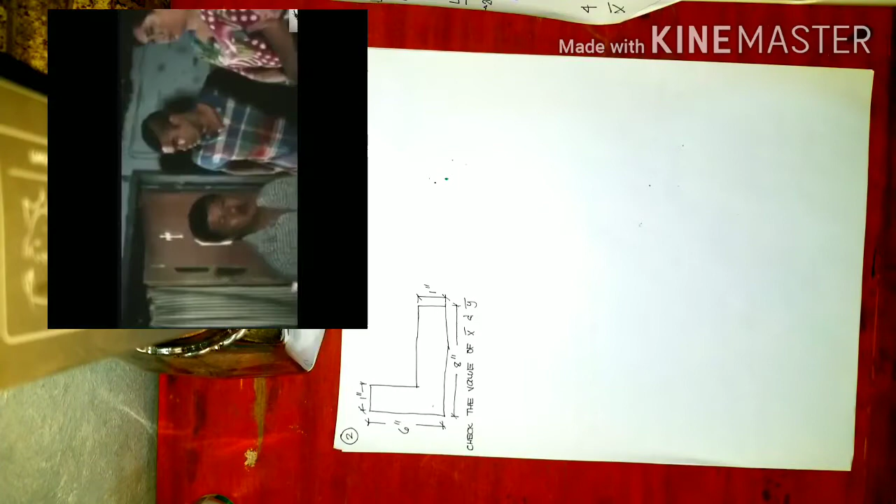Wow! Okay, so how do we do this? So, switch to your PowerPoint. This is the next slide. Problem number 2, composite area. So when we say composite, you have a figure composed of different shapes.

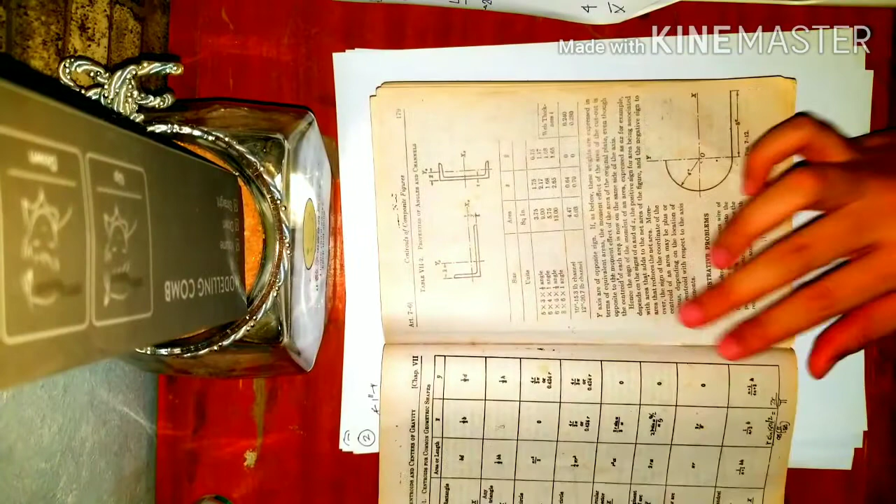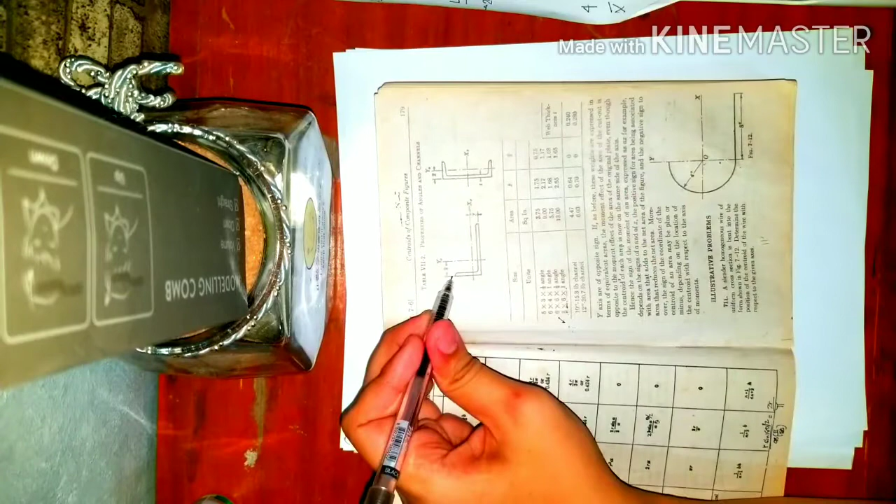Okay, so in the table, the total area is given, x-bar is given, y-bar is given. So this is the x-bar, and this is the y-bar.

So this axis, the x-sub-o and y-sub-o axis, that will be your centroidal axis. Centroidal meaning, at the centroid of your composite figure, that's where I made the x and y axis. That's why it's called the centroidal axis.

So when will you use this? In the next topic, which is the moment of inertia.

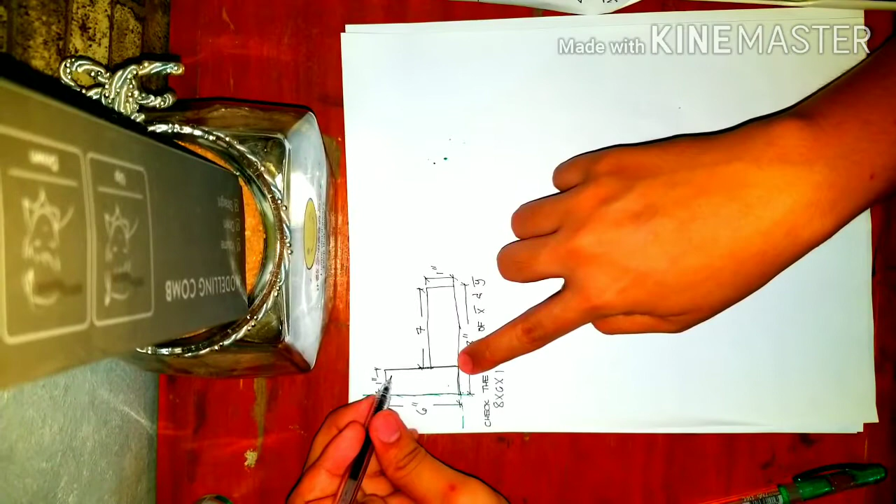Okay, so we formed two rectangles. What will be the dimension of this? Knowing this is 8 and this is 1, therefore this will be 7. And then if this is 6 and 1, this becomes 5. We don't really need the rest.

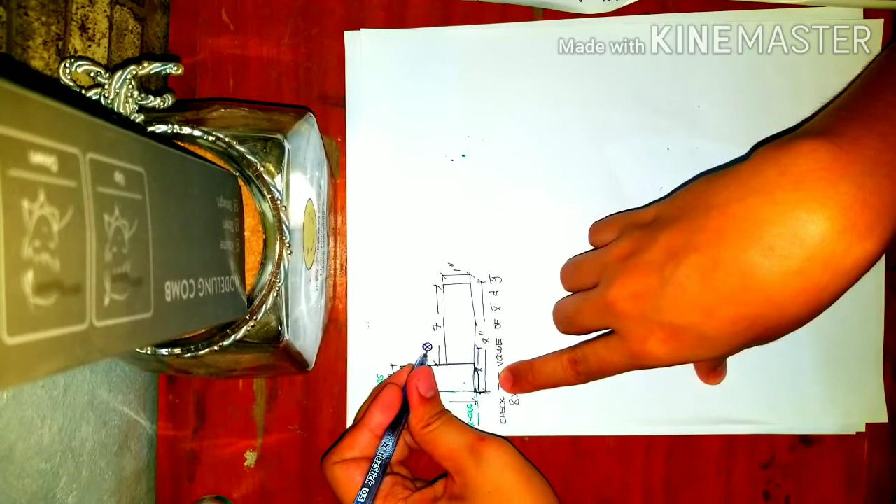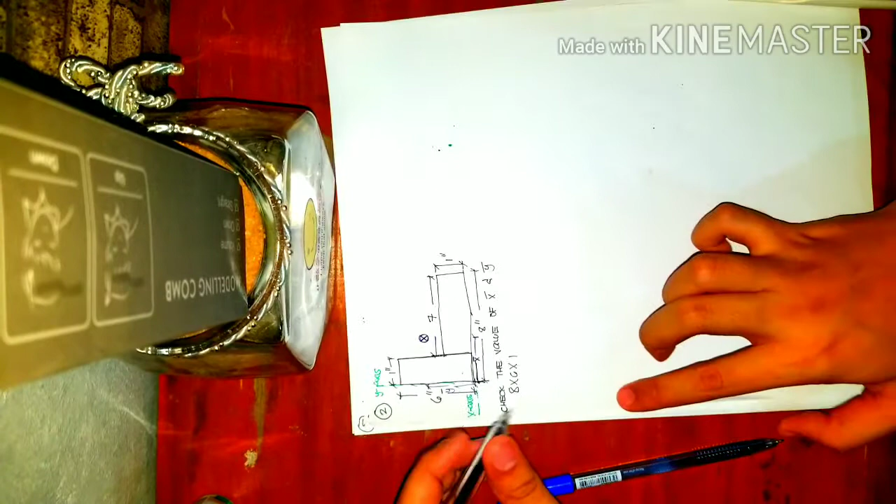Kagaya doon sa kanina, ito kasi length lang ng wire mo. So this time, area na yung pinag-uusapan. Mangyayari, we need to solve first for the total area. Ganun lang din yung magiging formula niya, parang ganun lang din yung concept. So area total, multiply by X bar or Y bar.

Unahin muna natin sa X bar. Is equals to the summation of A, area, tsaka X. So summation ng mga shapes na nabuo para mabuo yung ating composite area. So that will be A1, X1 plus A2, X2.

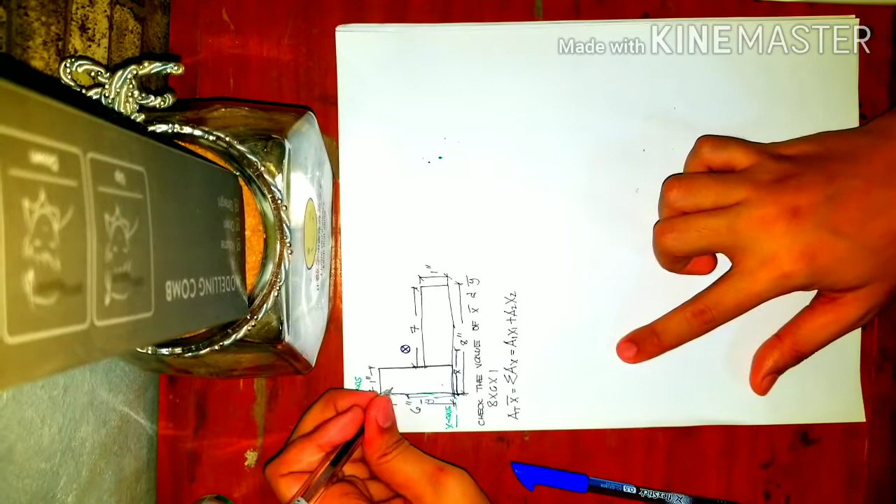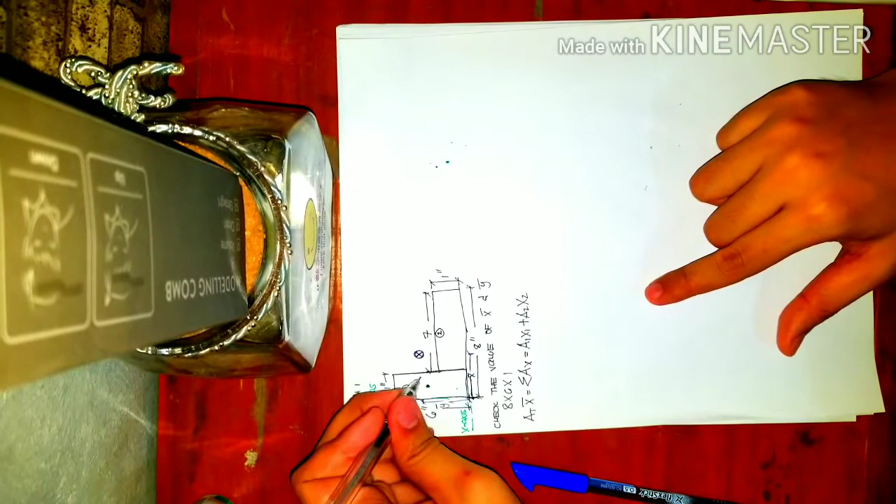Pangalanan muna natin yung mga rectangle natin. Sabihin ko to as si rectangle 1, and then ito si rectangle 2. Next thing to do, i-plot mo kung nasan yung centroid ng rectangle na to. Diba ito rectangle lang? Kung ito 1, ito therefore yung centroid niyan dito, kalahati lang, diba? And kung ito 6, syempre yung centroid niya nasa gitna lang din ito. Alam natin na ito, coming from this top, 3, so dito sa baba 3 lang din. Ayan, kinuha ko na lang din. Ito yung ating rectangle 2, andito lang din siya.

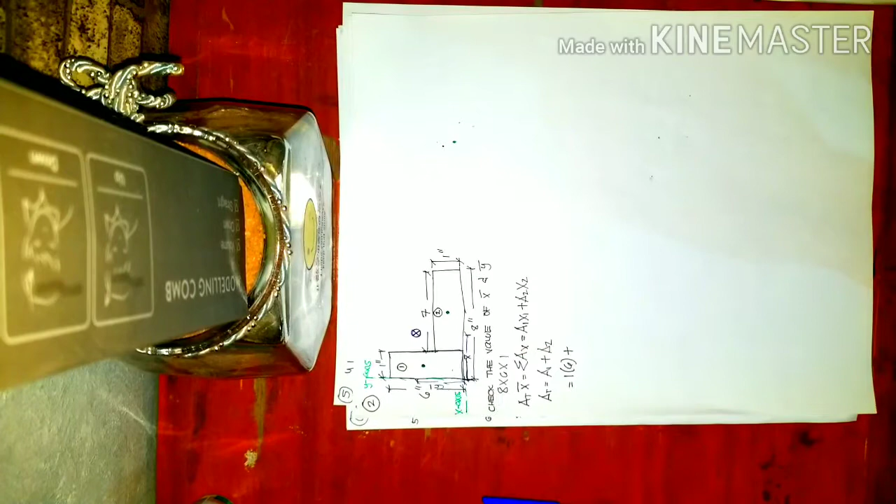Minarkahan ko na. Okay, unahin muna natin yung total area. To get the total area, that is just the sum of area 1 plus area 2. Ano ba yung area 1 natin? Itong rectangle na to, 1 inches multiplied by 6 inches, so 1 times 6. Plus area 2, anong area 2 mo? 7 multiplied by 1. So total area is equals to what? Sige, calculate mo, 6 plus 7, 13. So 13 inches squared.

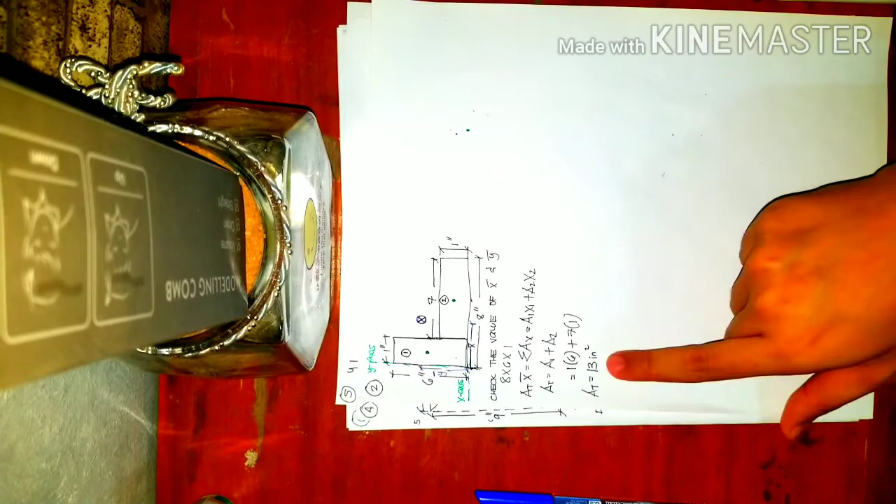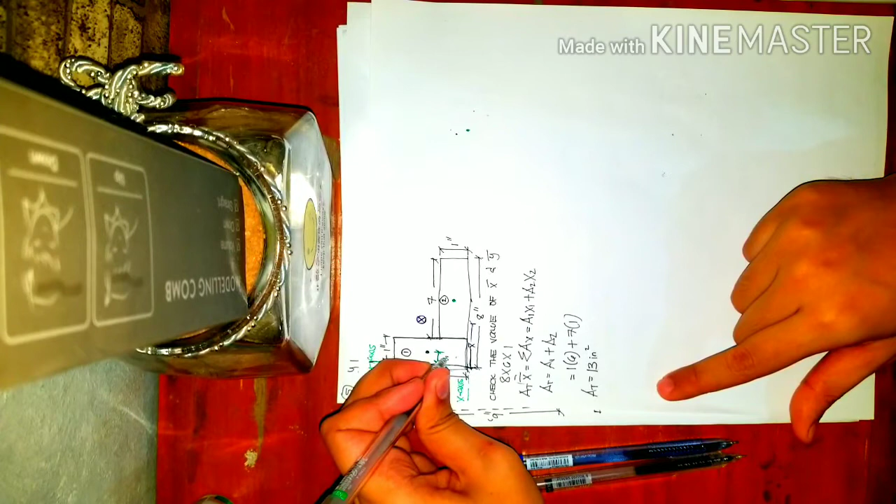Okay, since we have now the area, we can now solve for the X bar. Again, kapag X yung hinahanap, ang gawin mong reference axis is yung Y. Yung distance ng mga centroid mo coming from the Y-axis. Unahin natin si 1, ano ba yung distance nito coming from this axis? Diba ito lang siya? Yan yung... ah sorry, that is the x1. Kung saan yung x1 mo, equals lang saan? Tama, kalahati lang ng 1 or 1 half.

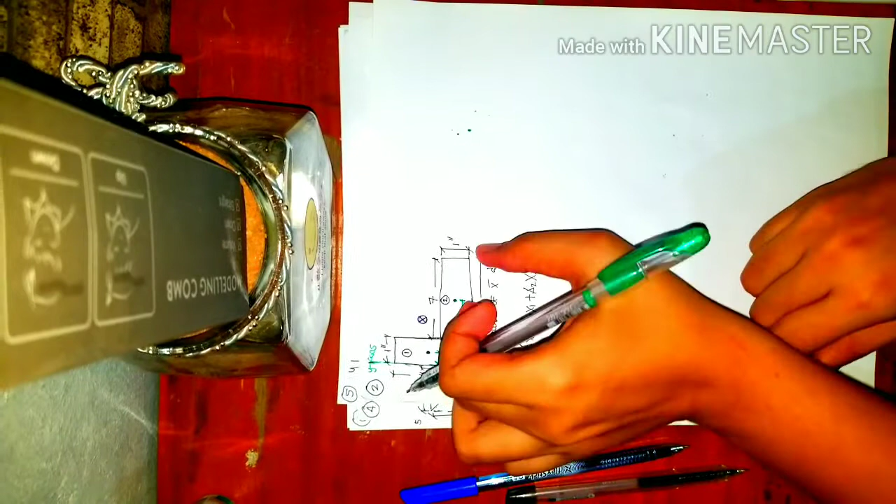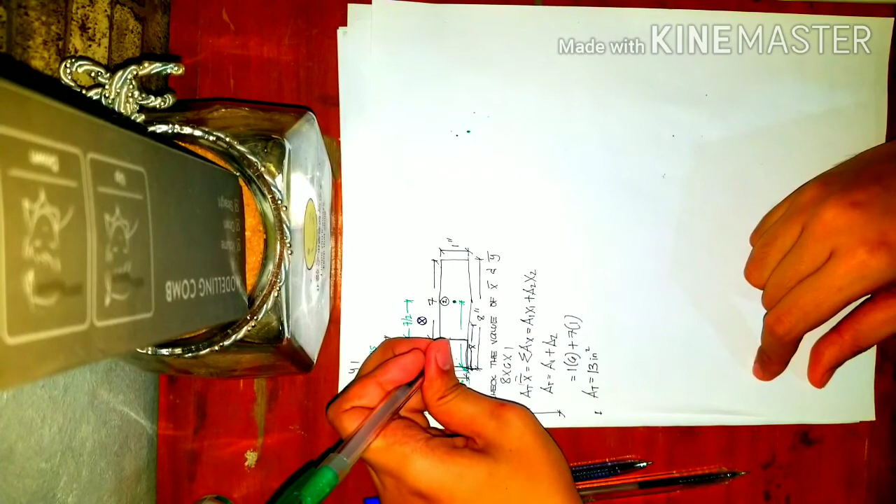Next, si x2. Again, coming from the y-axis, papunta doon sa centroid ng area 2. Ano yung distance na yan? So ano nga ito? Ito, diba kalahati lang ng 7 o 7 halves? 7 halves lang din ito. At sabi nga, coming from this axis, papunta doon, ano yung distance na yan? So ayun, 7 halves plus 1. 7 by 2 plus 1, so that will be equals to 9 halves.

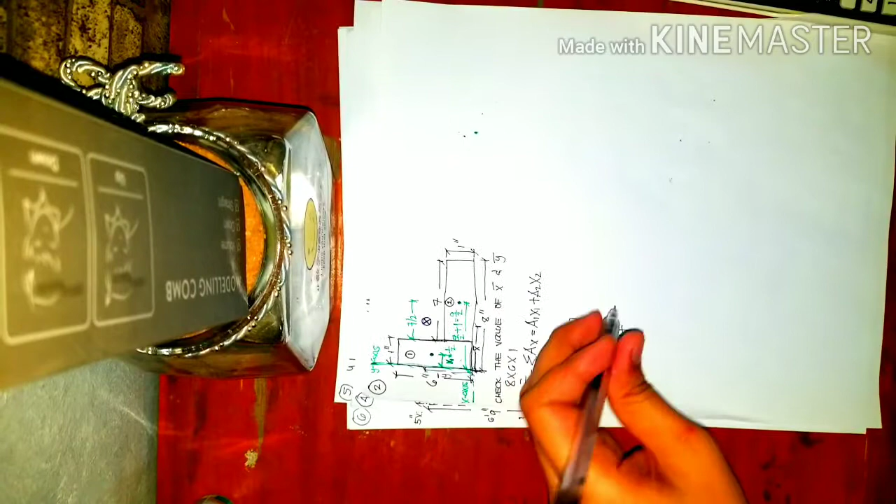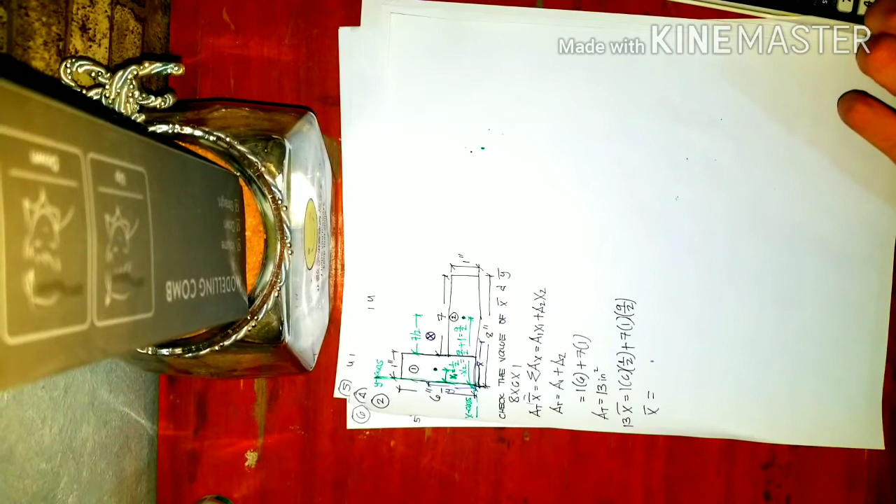At so we have now the value of x1 and x2. I think we can now solve for the x bar or the centroid of the composite figure. So we have 13 multiplied by x bar is equals to a1. Ano nga yung a1 natin? Kopyahin mo na lang to, 1 times 6 multiplied by x1 which is 1 half. Plus itong area 2, copy mo lang itong portion ng equation na to, 7 times 1 multiplied by x2. So x2 is just equals to 9 halves. So what will be the value of your x bar? 3 plus 7 times 9 by 2, all over 13. That is 2.6538 inches.

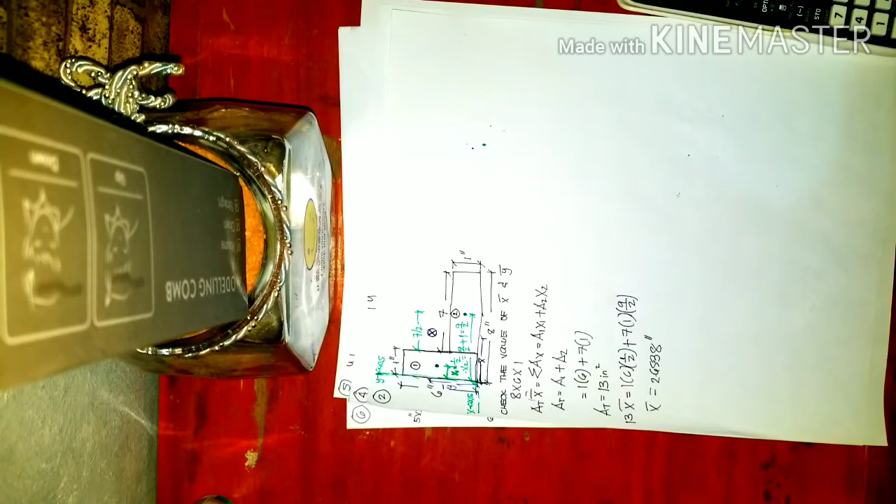Ano? So let's just check, ito sa libro. 2.65, okay so tama naman. Next will be the y bar.

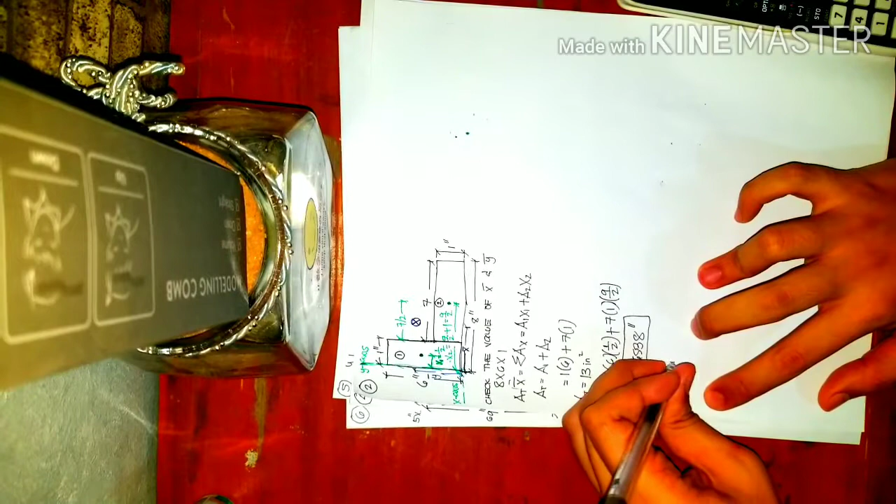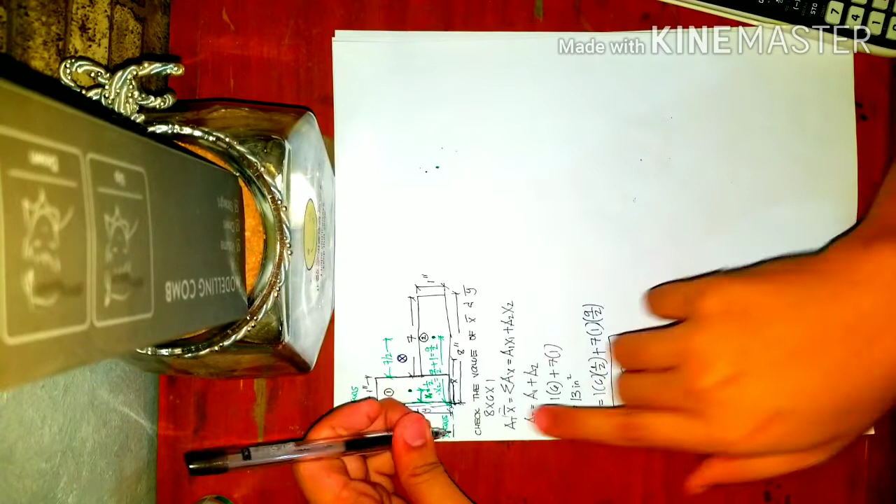Ganun lang din, pag y bar naman, sige sulat mo na natin yung formula. 13 y bar is equals to a1 y1 plus a2 y2. Ano naman yung gagawin doon? Since meron tayong value ng area, hanapin natin yung value ng mga distance na y. Again ang hinahanap is si y bar, ang kapartner niya yung opposite na axis niya, which is the x-axis. Ako lang itong x-axis. Ano yung mga distance ng mga centroid ng bawat shape na na-produce natin? Ng rectangle 1, rectangle 2. Para sa value ng y1, ito ang kailangan mo.

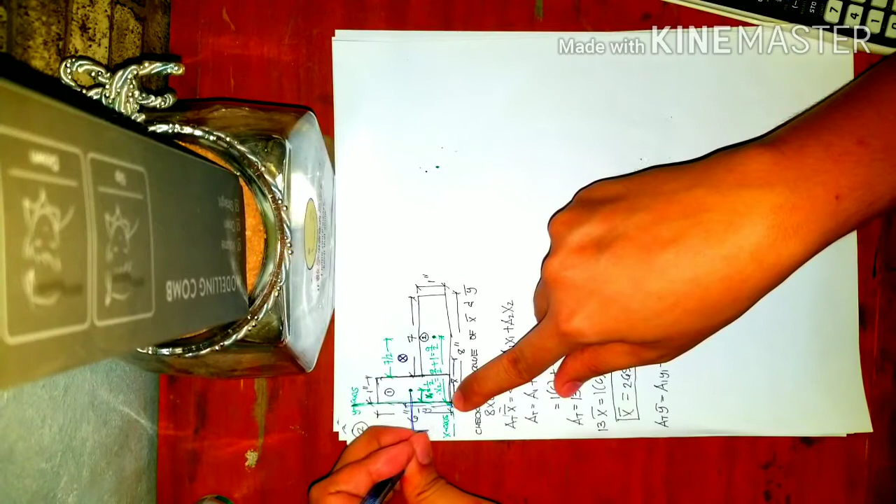Ano yung distance na yan, coming from this x-axis? Diba ito rectangle? Ano yung centroid ng ating rectangle? Diba ito? Kung ito ay 6, ano to? Kalahati lang ng 6 or 3. Gets?

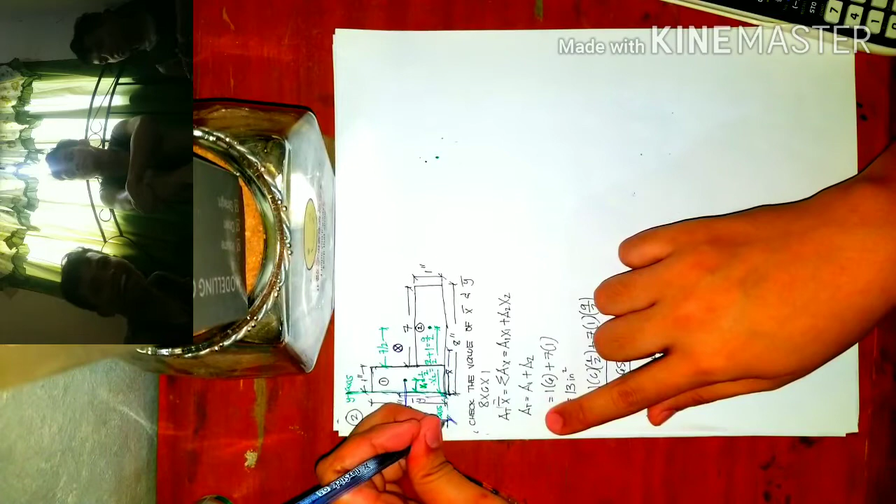Again, this is your x-axis, yung rectangle to naman tayo. Ang distance niya away from dun sa iyong x-axis, the perpendicular distance. Ayun sakto, perpendicular distance yun, na lang kunin yung concept. Ganyan yung mga distances na consider yung opposite ng axis na gagamitin multiplied doon sa perpendicular distance. Ang pinapahanap si y bar, ang axis na gagamitin natin, yung reference mo is the x-axis. Kung saan perpendicular distance ang hinahanap, again dapat naka 90 degrees siya. Ano yung distance na to? Knowing this is 1, kalahati lang ng 1, or that will be 1 half.

Okay, so we can now solve for this y bar. That is equals sa area total, 13 multiplied by y bar is equals to area 1, 6 times 1 multiplied by 3, plus area 2, 7 times 1 multiplied by 1 half. So y bar is equals to 6 times 3 plus 7 times 1 half, all over 13. So that is...

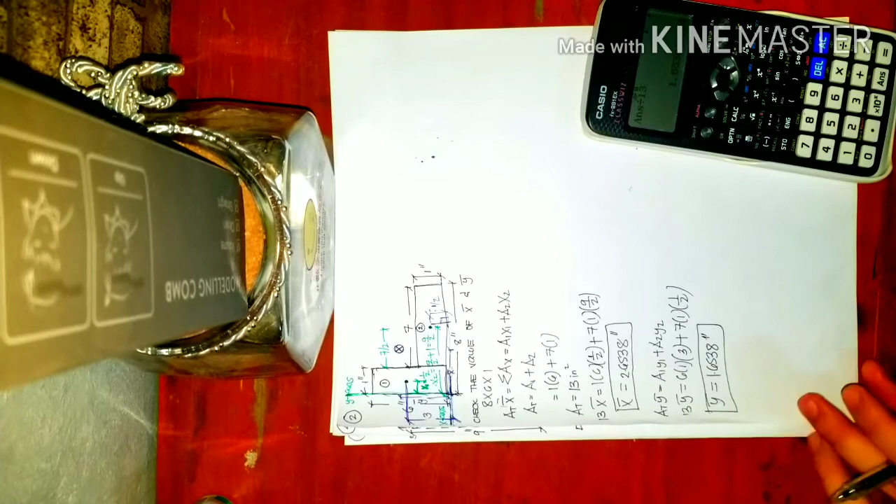1.6538 inches. Okay, ano sabi sa book? 1.65, so 2 decimal places lang yung sa libro. Mas tama yun sa atin. Ano? Okay, so try naman natin yung isang solution na sinasabi ko sa inyo, yung pang tamad solution.

Okay, so one way of solving this is yung tinatawag namin before na tamad method o si Boy Dagdag Bawas. Siguro na gagas yun yung principle na about this one. So pwede nyo siyang gamitin. Mas mabilis naman talaga to, lalo kapag mga W section o yung mga I-beam.

So si Dagdag Bawas na lang. Okay, so considering the same figure, ang mangyayari lang, gagawin ko, bubuuin na natin na ganyan. So ano nga yung total span niya? So ito, di ba, alam natin na ito ay 8 inches. And yung height niya is 6 inches.

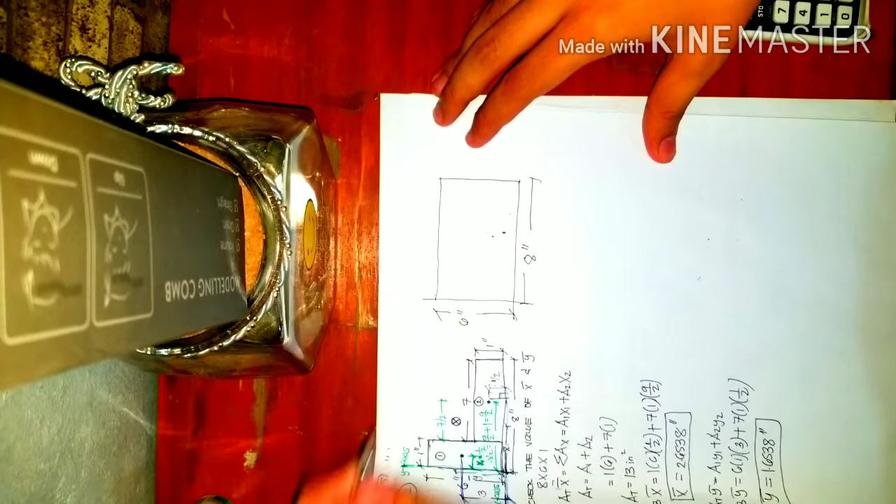So ano nga ang dimension ito? So kung ito ay 1, therefore ito ay magiging 5. So inaalam ko yung ibubutas ko para makapag-produce ako ng angle section. So ito will be 7. So yun lang.

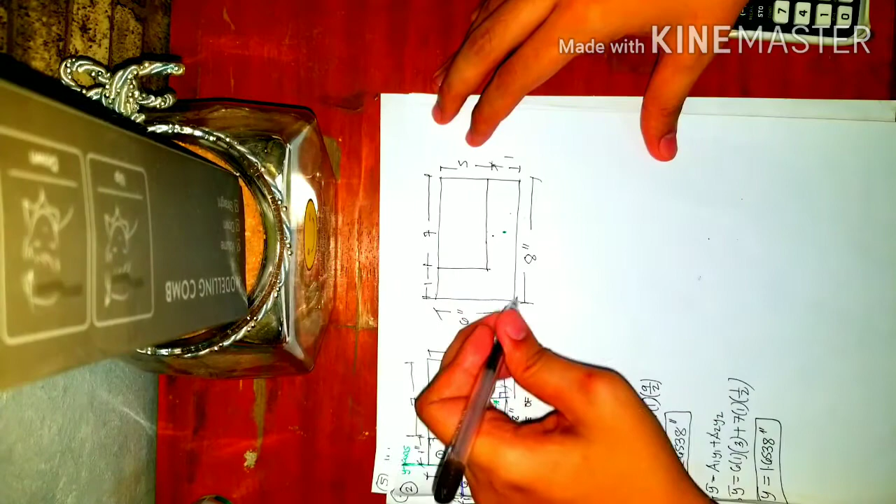So ito 7. So ito C 5. So ito magiging 1. Ito magiging 1. Ano? So ang nangyari, meron kang malaking rectangle. Babawasan ko ng 7 by 5. So anong matitira? Di ba itong L lang din na ito? So gawin natin, susubtract ko to.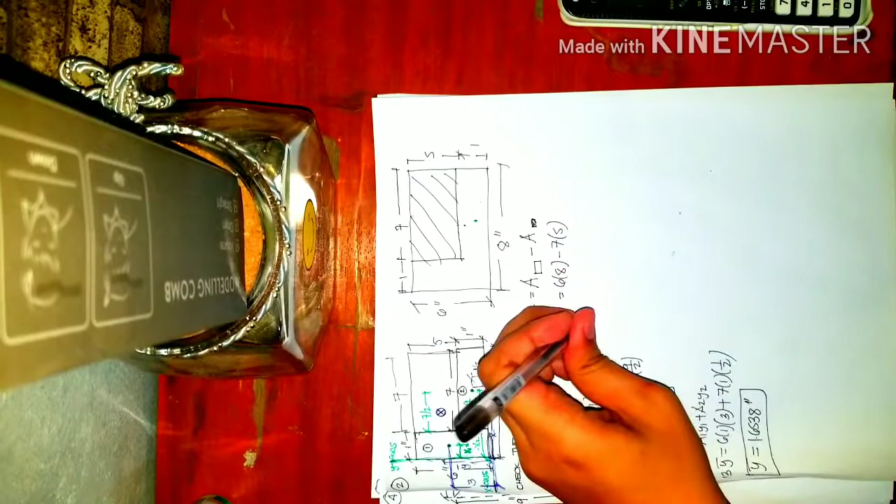Okay, so 6 times 8 minus 6 minus 7 by 5 minus 7 by 5. So area total, so 48 minus 35, 48, so 13. So ayan na, magic na.

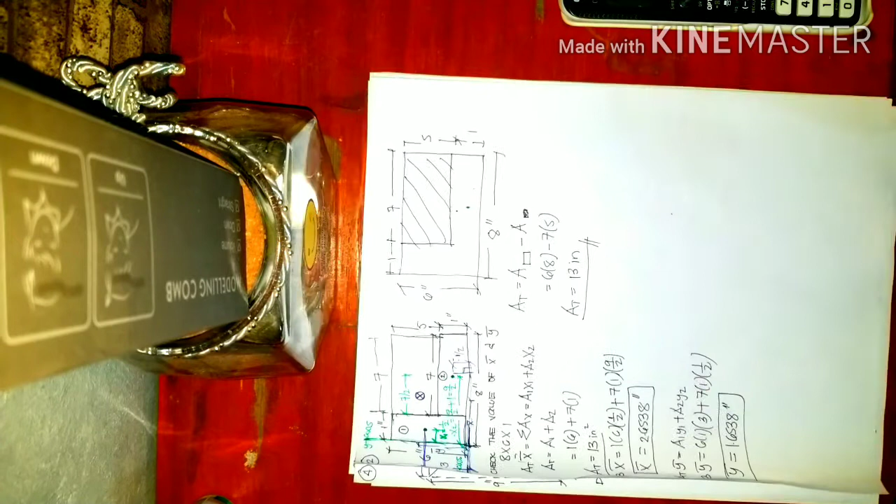So same lang din. Okay, next thing to do, sige, ang gawin ko para yun na lang din, axis na yan. Ito na lang din. So this is your y-axis, this is your x-axis. Yan magiging reference natin. So ano muna natin kinuha dito?

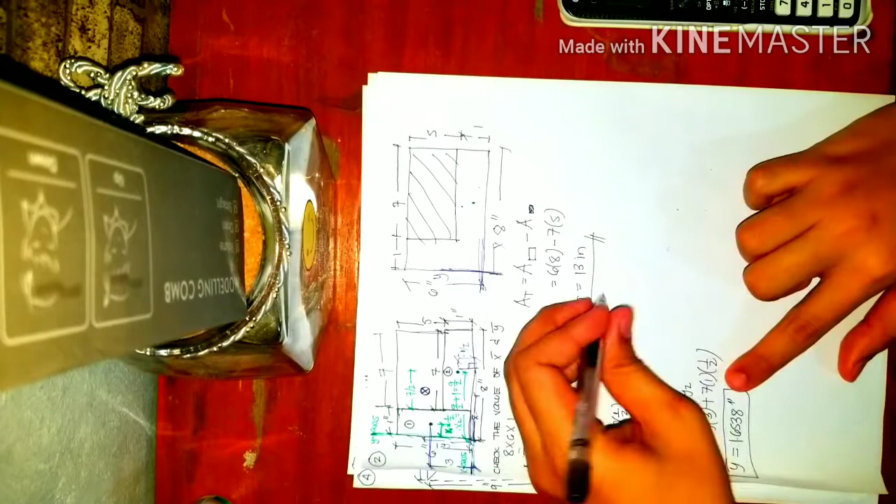Yung x bar. Okay, so 13 multiplied by x bar. So identify muna natin yung centroid ng bawat shape. So unahin ko tong yung malaking rectangle. Ayan, pag malilito, nasa ng centroid niyan. So di ba nasa pinakagitna yan? So anong distance nito coming from the...

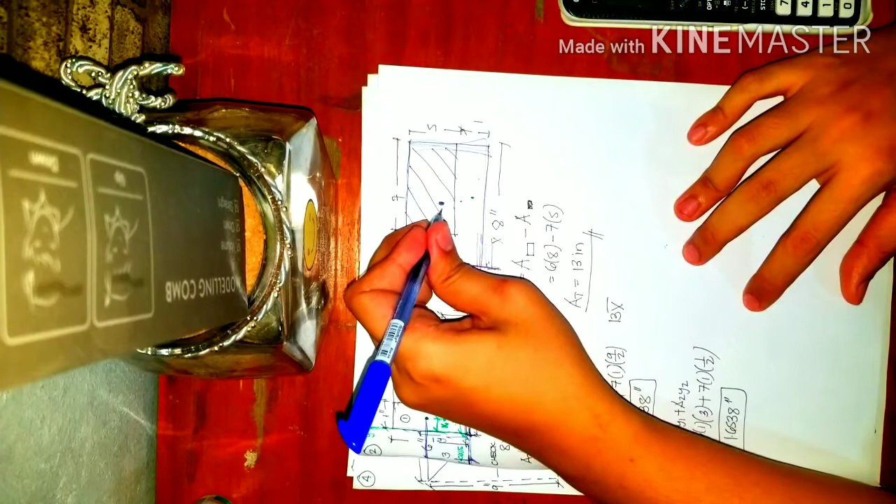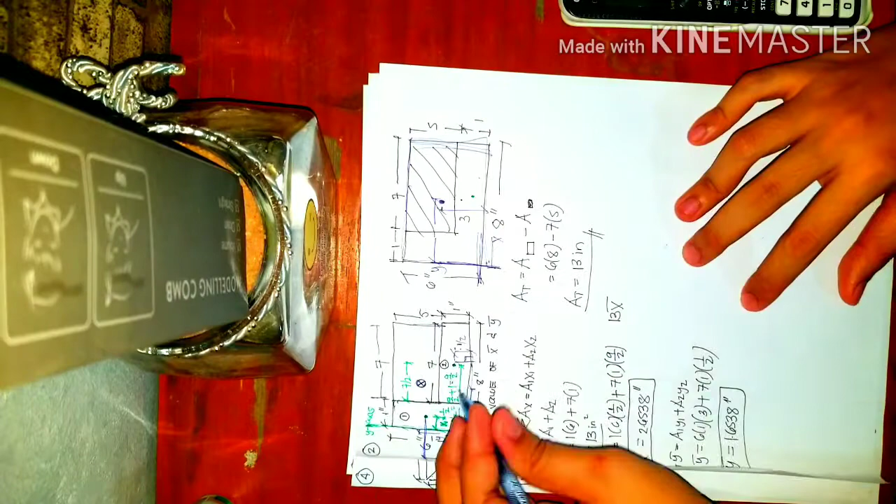So kung ito ay 6, ano to? Tama, that is equals to 3. And then ano yung distance niya? Papunta dito. Ayan. Coming from the y-axis. So kung ito ay 8, ano to? Correct. That is equals to 4.

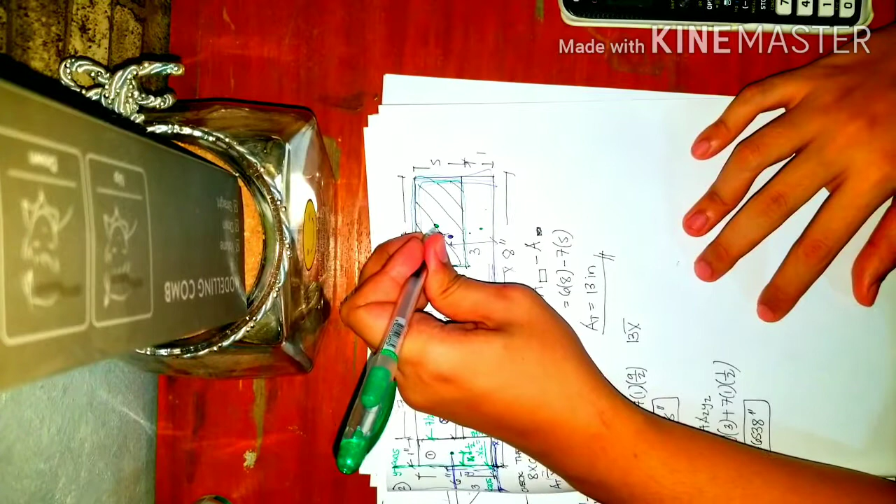Okay, next. Next, considering this time itong yung butas, yung naka-shade na yan. So, nasa ng centroid yan? Diba ang centroid yan is yung gitna lang din naman ng rectangle. Ano? So, ang kailangan nating hanapin, so, ano itong distance na to? Paano mo makuha yan?

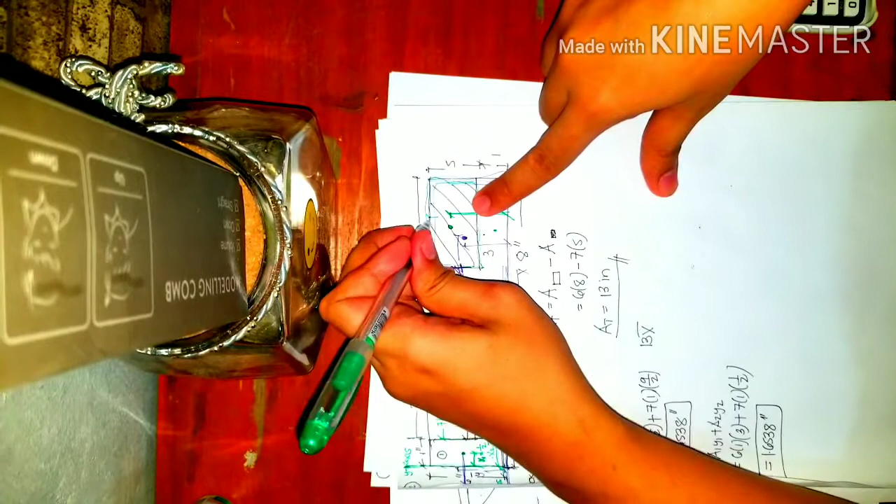Diba, ano to? Diba ang height na to is equals to 5? So, ito, ano to? Itong distance ito. So, diba yun ay kalahati lang ng 5 or that is equals to 5 over 2. Therefore, ano yung distance na to? Ayan, ito yung kailangan natin with respect to sa ating x-axis, yung perpendicular distance. So that is just equals to, knowing this is 6, or 6 minus 5 over 2.

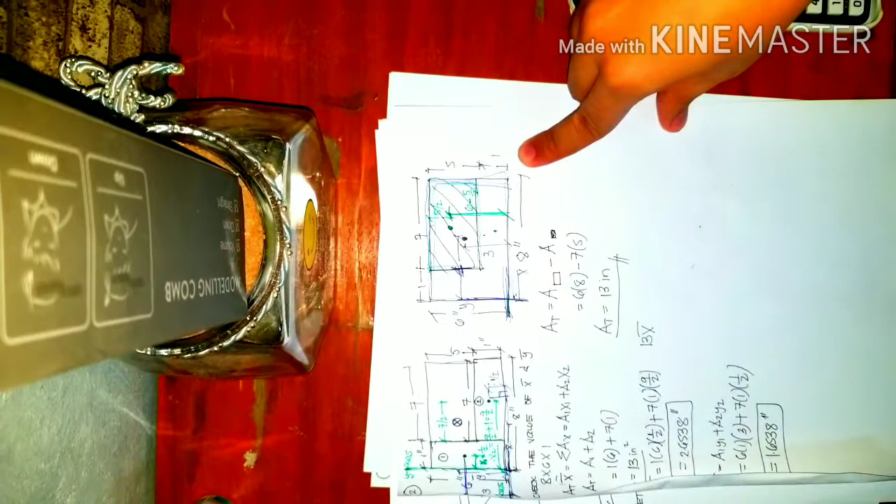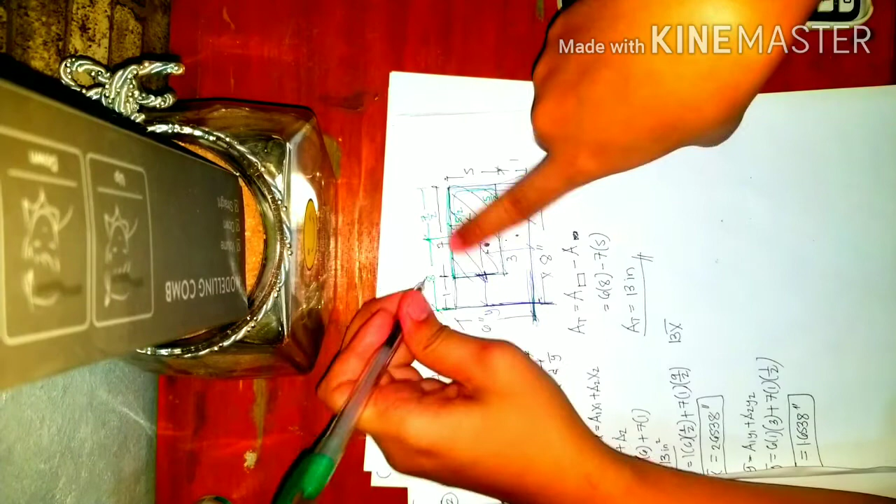Okay? So next, with respect naman to sa y, yung perpendicular distance niya. Next, I need to know this distance. Ganun lang ulit. Ano to? Diba ito 7? So ano to? Ayan. So that is just equals to 7 over 2. Therefore, this distance is just equals to 8. Diba? Ito ang total nito kasi 8. Minus yung kalahati ng 7 or 7 over 2.

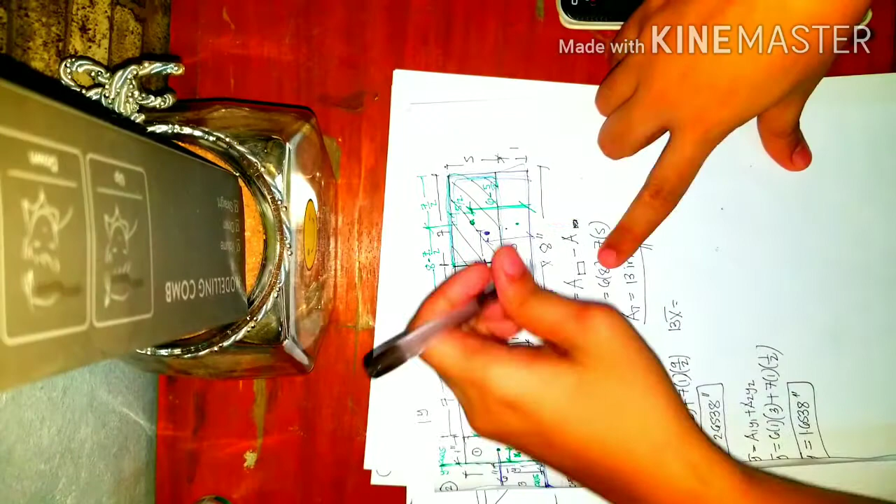Okay, so I think we can now solve since meron na tayong mga value ng distances. So area total times x bar is equals to yung area nito, itong malaking rectangle. So area niyan, so that is ito lang, 6 times 8 multiply by x bar. So ang kailangan ko is ito, yung distance ito. So that is multiplied by 4 and then minus, since yung butas na yon, hindi naman talaga siya kasama.

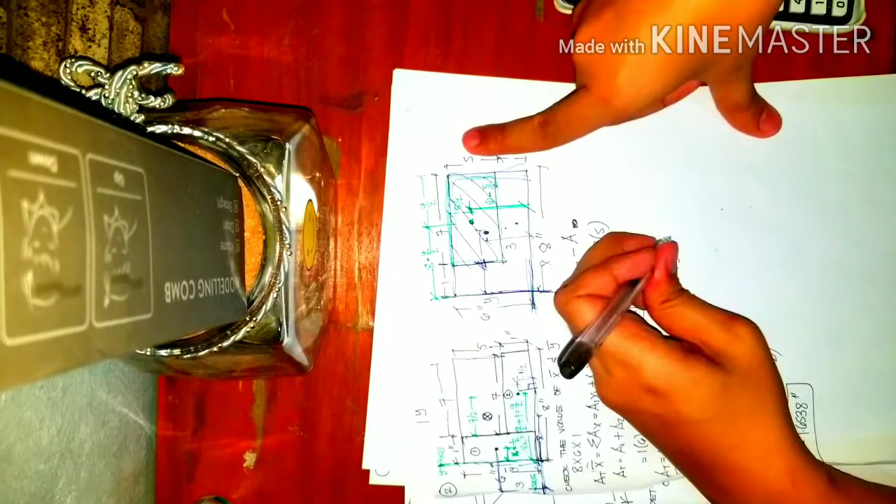So minus 7 times 5 multiply by the distance of ito. So minus ito. So minus 8 minus 7 over 2. So what will be the value of your x bar? So 6 times 8 times 4 minus 7 times 5 times 8 minus 7 over 2. So answer divided by 13. Yun! So 2.6538

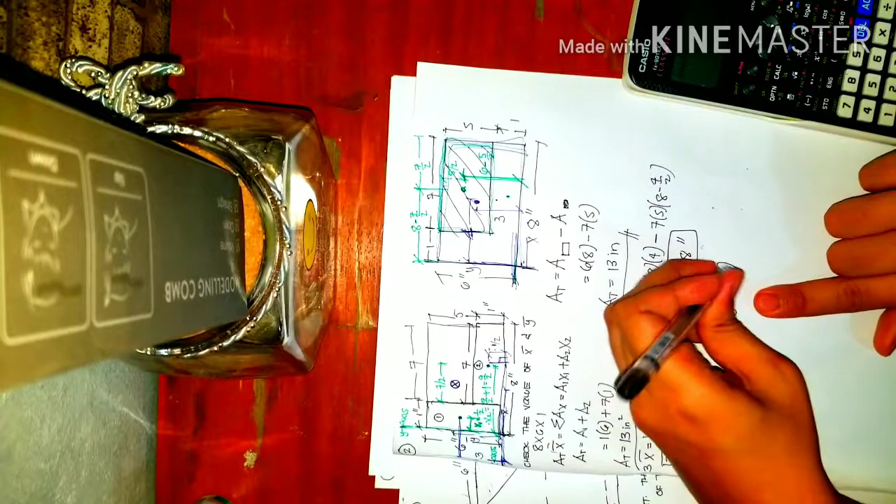inches. So same lang. And then for the y bar, so 13 area total times y bar is equals to yung area 1, so 6 times 8 multiply by the distance na ito, which is equals to 3. And then minus yung butas, so 7 times 5 times yung perpendicular distance, which is this one. So 6 minus 5 over 2. So what will be the value of y bar? 6 times 8 times 3 minus 7 times 5 times 6 minus 5 divided 2.

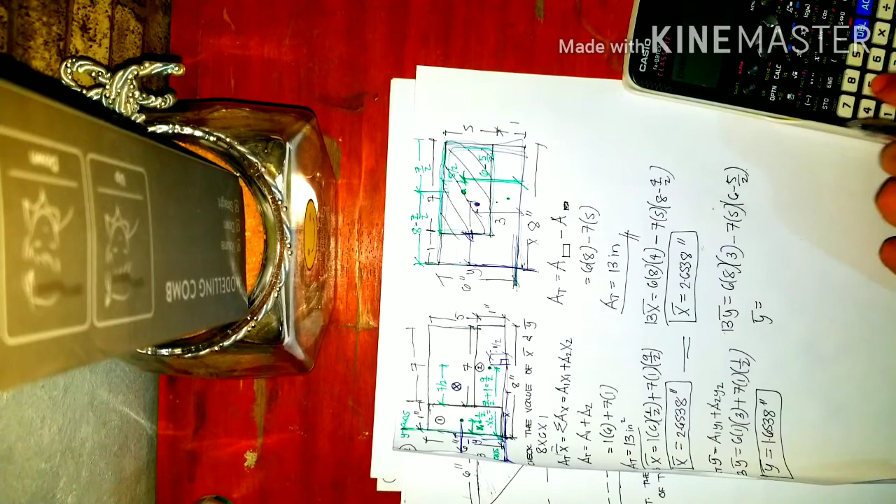So that is 1.6538 inches. Ayos! Pareho. Okay, so kung nakikita nyo siguro kung paano ako pumindot, practicein nyo yan ha.

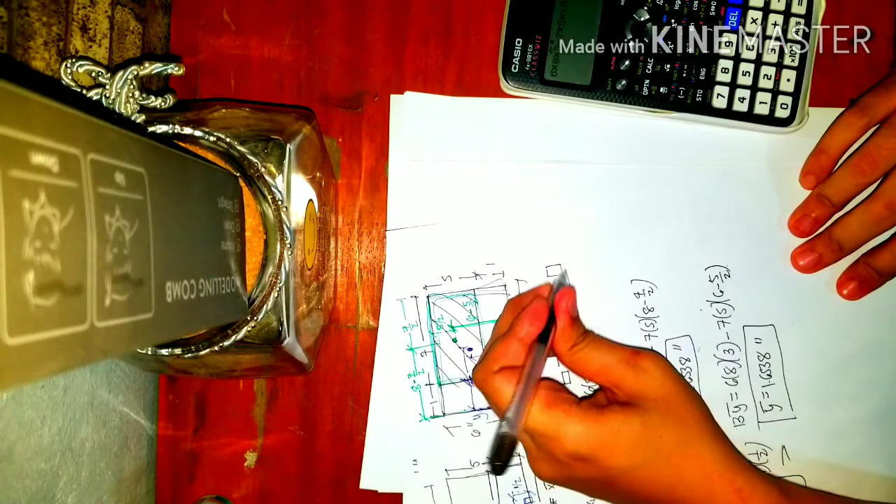Ang mangyayari, akala mo napindot, na-encode sa calculator. Hindi pala napindot. So, ang mangyayari, pag pinindot mo siya, yung equal, yung final answer, maling lalabas sa sagot. So, ang gawin nyo na lang kapag may mga fraction, maximize nyo na ang paggamit ng times divide, tsaka pagkulong ng parenthesis. Though ito nakakabagal din, pero kapag medyo complicated, pwede naman siyang gamitin instead of times. Okay, so next problem tayo.